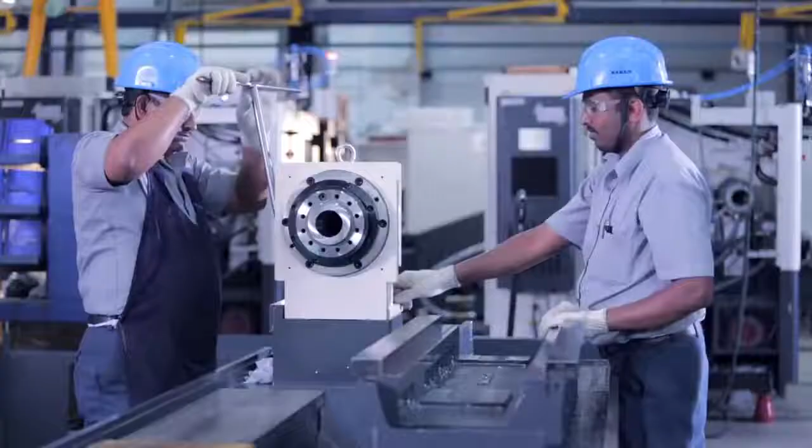With 42 years of machine building excellence and the experience of delivering 60,000 machines, Ace Micromatic Group, AMG, has played a key role in the industrial evolution of India and the world over. With more than 70% repeat customers, AMG is renowned for its technical capabilities in the machine tool realm.

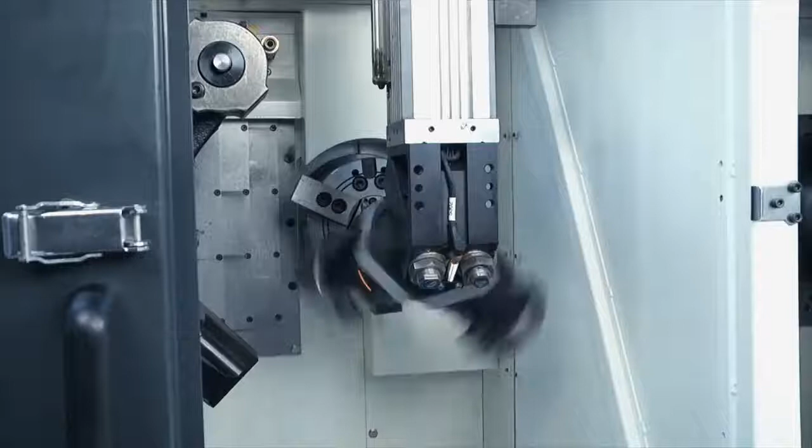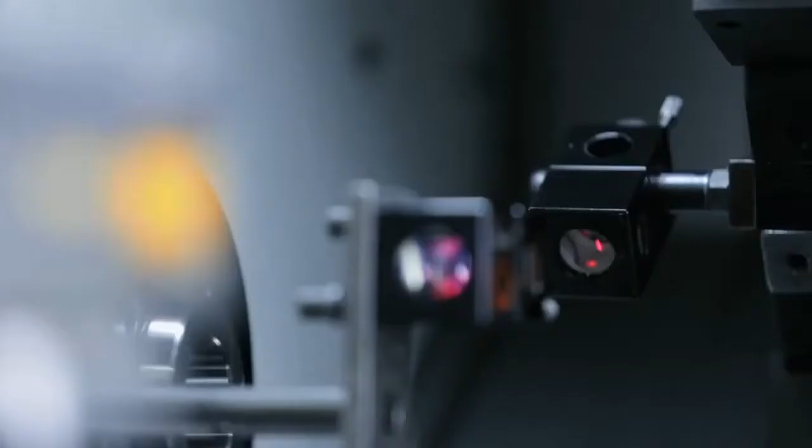Driven by passion for service, cost effectiveness, and a strong value system, AMG is the preferred machine tool partner across market segments. With a global footprint in over 15 countries, AMG machines have been an invaluable resource in producing quality components for a diverse range of applications.

With the vision to be a single-window solution provider for all customers' shop floor needs, we offer a wide range of products in the market, ranging from turning, milling, grinding machines, SPMs, to IoT and automation solutions. The group also envisions to diversify into newer technologies and geographies, thereby offering a wide range of solutions to our customers. Ensuring customer success through cost-effective solutions has been the motto of the group.

Today, with the inclusion of AMACE Solutions as our additive manufacturing arm, we are ready to revolutionize the manufacturing industry yet again. The current global metal additive market is valued at about $2 billion but growing with a CAGR of 29%. The additive manufacturing technology is rapidly evolving to be a preferred way of manufacturing. It is now seeing widespread adoption in sectors like aerospace, defense, medical, automotive, among others.

AM technology is being explored not only for prototyping but also full-fledged production of parts. With the increasing acceptance of technologies like laser-based powder bed fusion today, we have reached a position where these machines need to be made in numbers viably to cater to the demand that is gaining. We welcome you to the additive manufacturing era.

Additive manufacturing offers unlimited design freedom. Design parts without worrying about process feasibility limitations that come with traditional manufacturing. In addition to this, the technology enables multiple parts with design variations to be printed in one go. AM simplifies part structure by eliminating auxiliary connectors and reducing the assembly time.

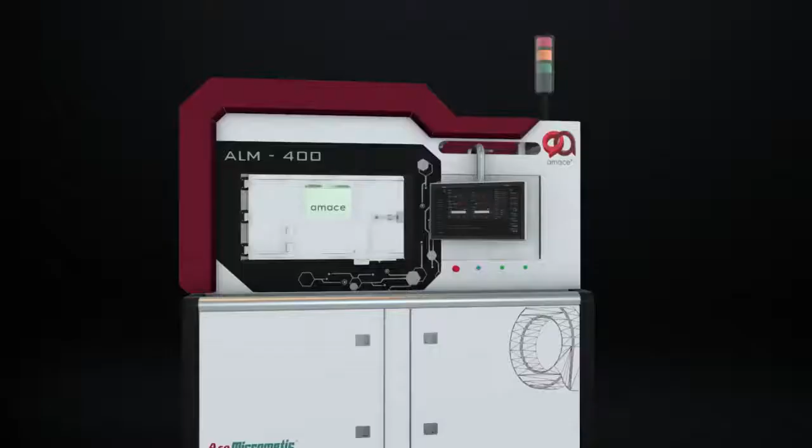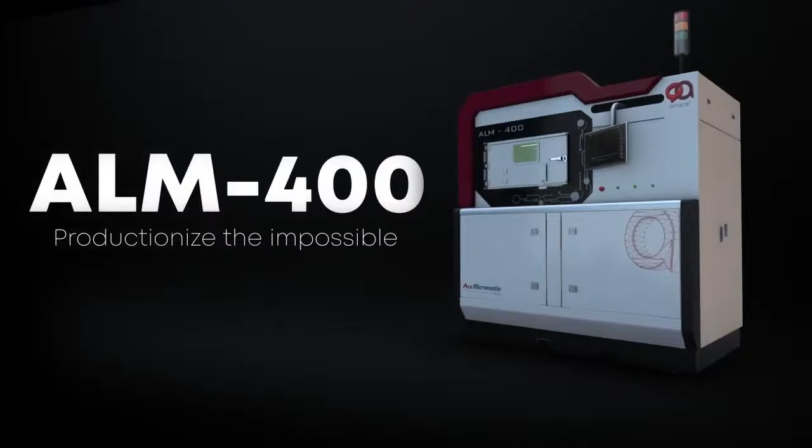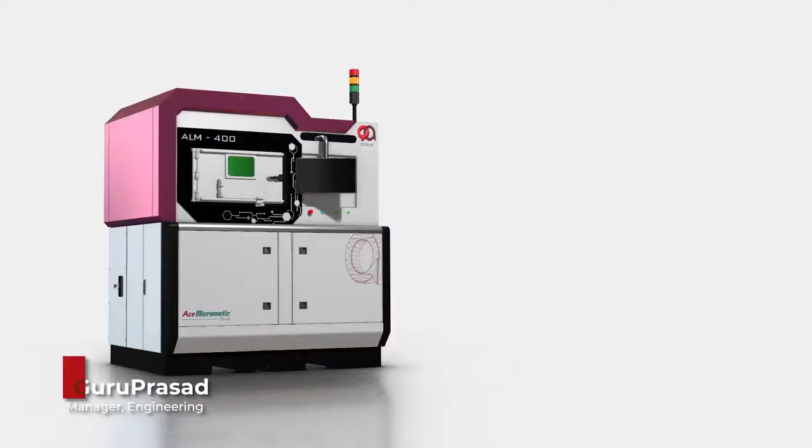For us at AMACE, the focus has always been to develop production-ready machines to suit large volumes of part printing. It provides the flexibility to address larger sized parts and also higher volumes of printing. The machine is designed keeping in mind the wider variety of materials that would be required for development and experiments by the industry. Versatility of printing has been a key consideration in the engineering process.

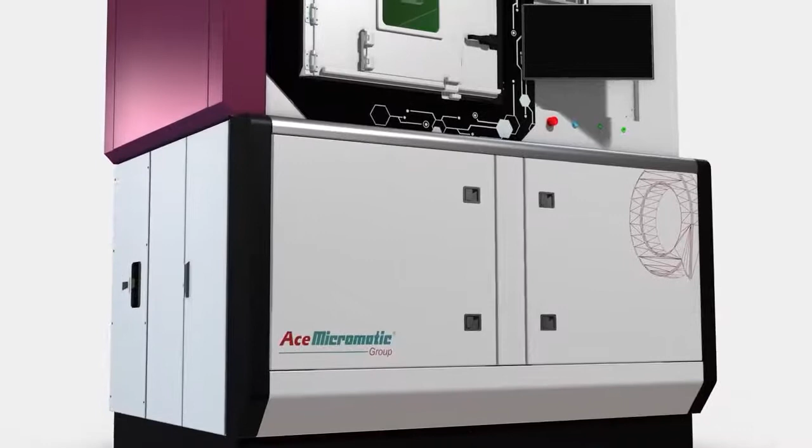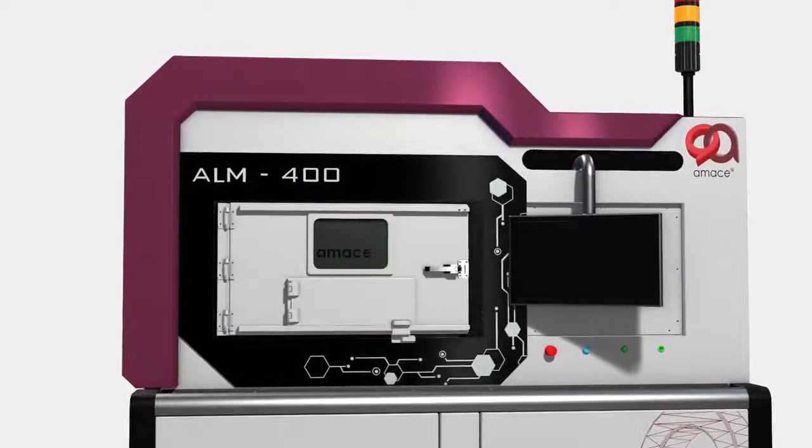The machine is equipped with a high productivity printing process and enhanced build parameters. This allows the printing process to be completed faster. The machine has all the necessary features to minimize the setup time, preparation time, and changeover time. The machine has a build envelope that allows large size parts to be printed on it.

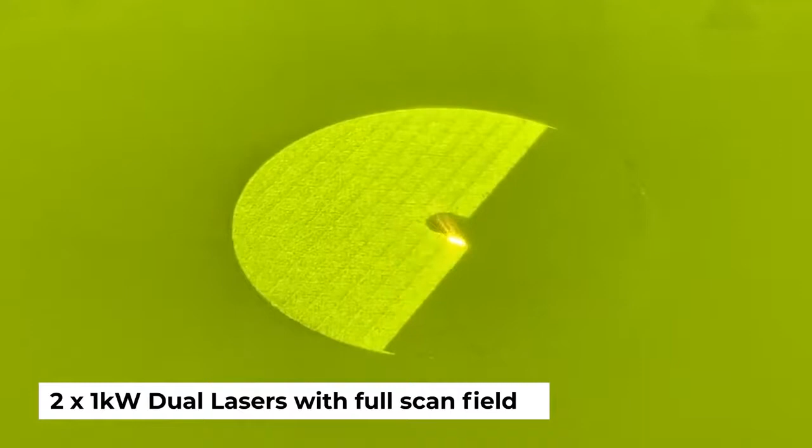A high-powered dual laser system enables faster printing with the ability to print higher layer thicknesses. With two high-powered continuous wave fiber lasers being offered as a standard feature, the machine allows for a wide range of materials and applications to be developed. The machine allows varying layer thicknesses to be printed.

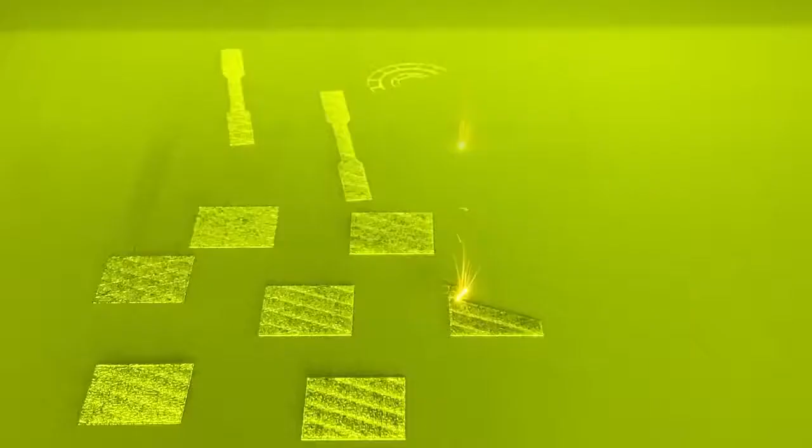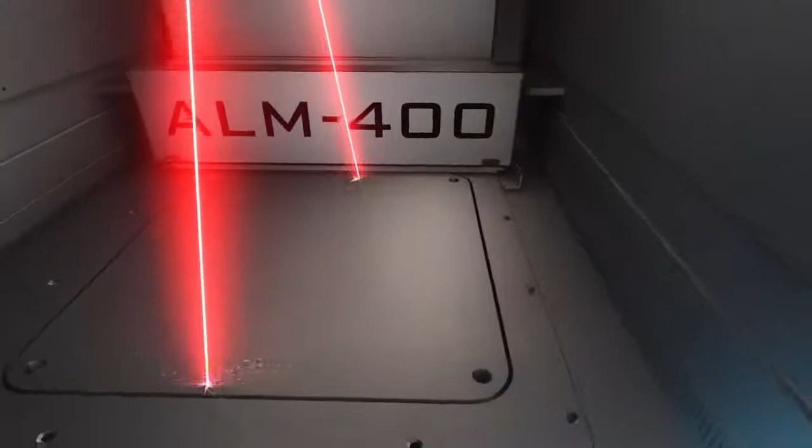The scanning system with digital encoders provides superior positioning accuracies and long-term stability, making it suitable for long periods of printing with minimum drifts. A dynamic focusing system allows exceptionally precise, high-performance positioning of the laser beam along the optical axis. The full scan field scanning system allows both the lasers to reach any corner of the build volume, thus more than doubling the print productivity.

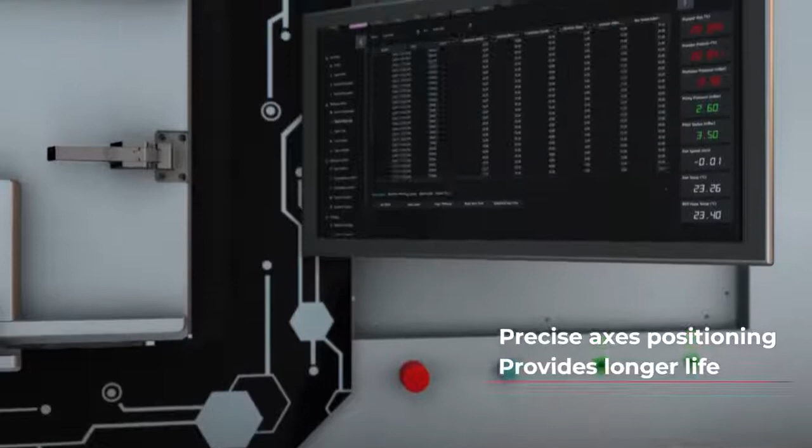The machine is equipped with an all-servo motor controlled by the most advanced PLC hardware, allowing more precise axis positioning, longer life, and enhanced serviceability. This also ensures a faster recoating, thereby minimizing the overall print time.

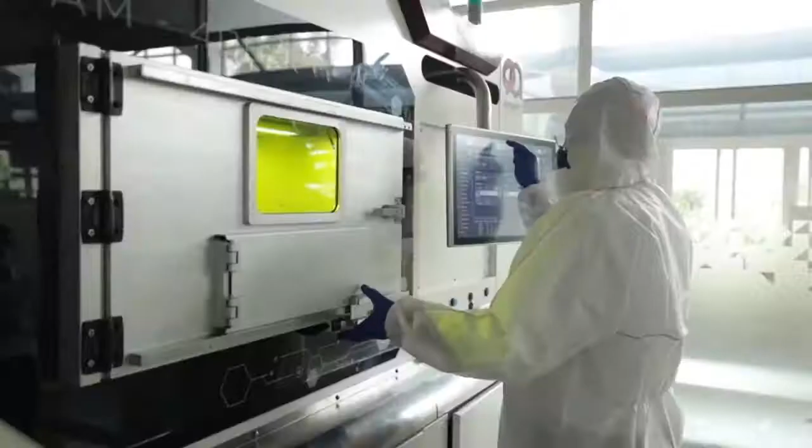An innovative multi-blade recoater system facilitates printing with minimum downtime during a build failure. This technology allows the operator to quickly index the recoater blade in the event of minor damages to it, thereby salvaging the build. A recirculating pump ensures minimum consumption of the inert gas, which is generated from a built-in system. The laminar gas flow on the powder layer maximizes the collection of the burnt powder during the printing process, thereby ensuring superior quality of the printed parts.

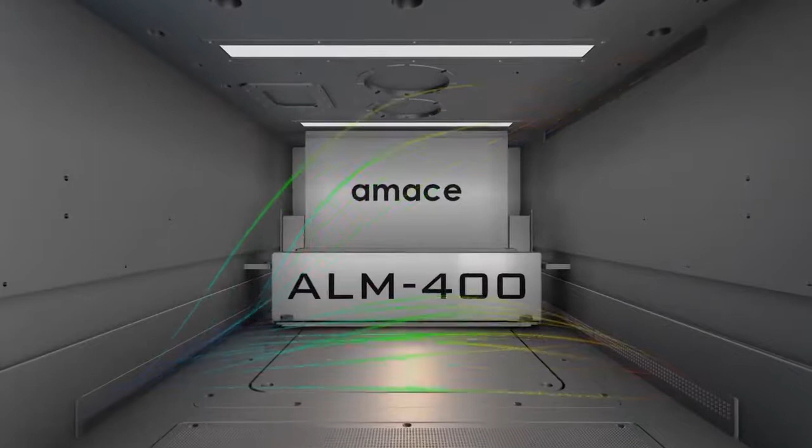The ALM 400 comes equipped with a host of features to enable safe and effective powder management. The smart powder management system comes with a real-time powder measurement unit which provides the current volume of powder available in the machine's storage section. A predictive system dynamically estimates the exact amount of powder required to complete the current print job based on the layer volume. This smart system allows the operator to plan for the amount of powder required in advance without having to stall the machine for want of powder.

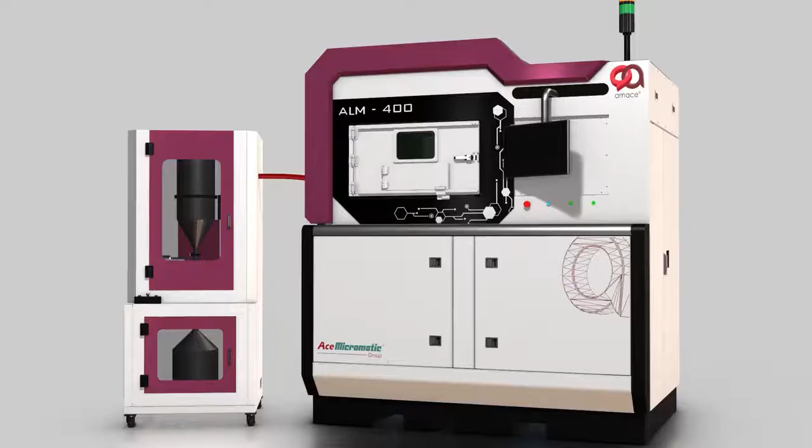A fast powder extraction system from the build chamber post-build ensures the machine is ready for the next print job in short durations. The entire powder collection from the machine's build chamber, sieving and restoring of clean powder is maintained in an inert environment. The machine is offered with fully open, editable parameters for a wide variety of metals such as aluminum alloy, stainless steels, maraging steels, Inconel, titanium, and many more.

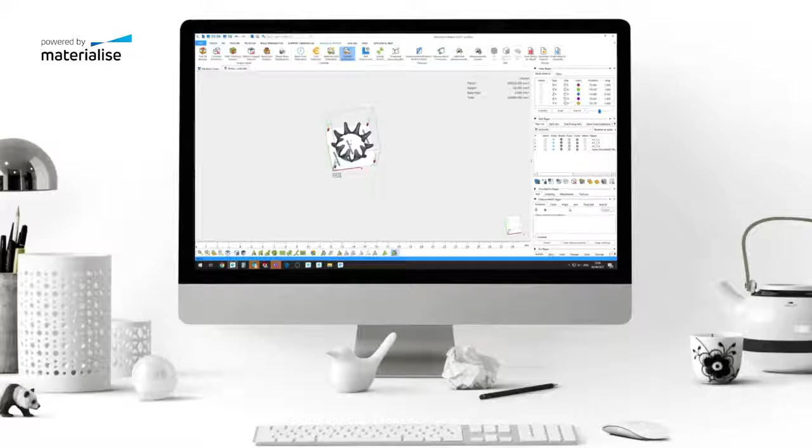The machines are built with best-in-class subsystems providing the highest level of machine reliability and superior quality of printed parts. The laser and scanner control system, which is the heart of the printing process, is controlled by hardware and a custom-developed software from Materialise. The build processor offers a seamless integration with the Magics and support generation software with most optimized data flow for build speed improvements.

The machine design is validated by an expert team from Materialise. The ALM 400 also complies to some of the most advanced machine building standards in terms of geometric capability assessments. The machine is made friendly not only to operate but also for maintenance and servicing.

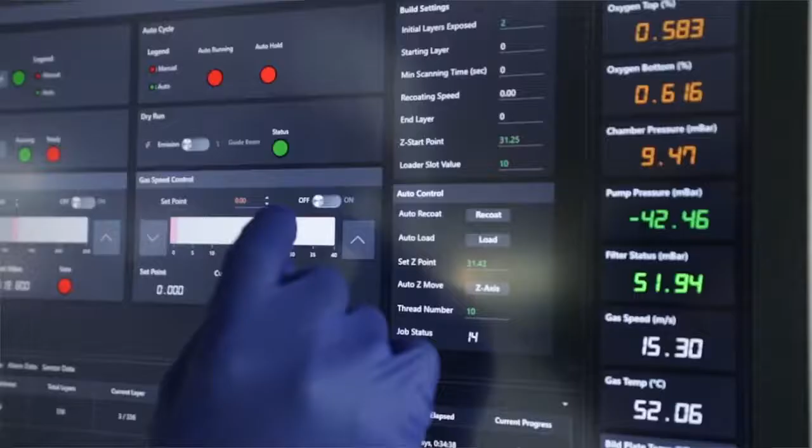The powder loading is done outside of the build chamber, giving the operator freedom to load powder during the printing process. There are troubleshooting guides that support in faster retrieval of the machine, ensuring minimum breakdown time. Periodic maintenance alerts along with real-time monitoring of the vital statistics of the machine ensures better reliability and higher productivity.

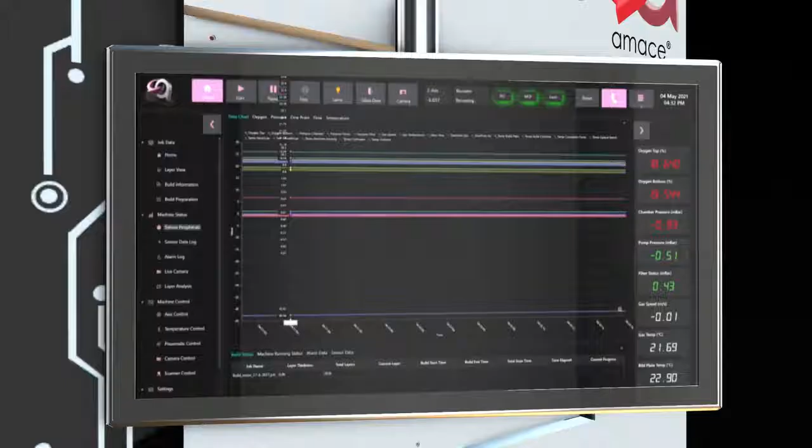The ALM 400's control interface comes with inbuilt intuitive features facilitating the user with timely inputs about the machine status and recommends suitable action if required. This also ensures smooth operation with minimal intervention, further enhancing the user experience. Key parameters such as pressures, temperatures, oxygen levels, coolant level, and many other critical parameters are monitored and controlled.

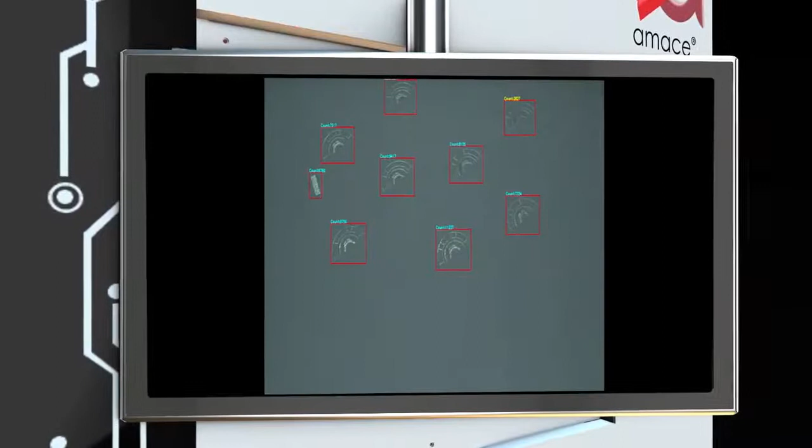A digital cockpit provides the machine's performance parameters with historical data of the build progress. A vision-based monitoring and inspection system identifies the deformations or issues in print after every layer. The inspection tool also compares the print area to the layer data and detects any non-conformances in the process, thereby allowing the operator to decide further course of actions.

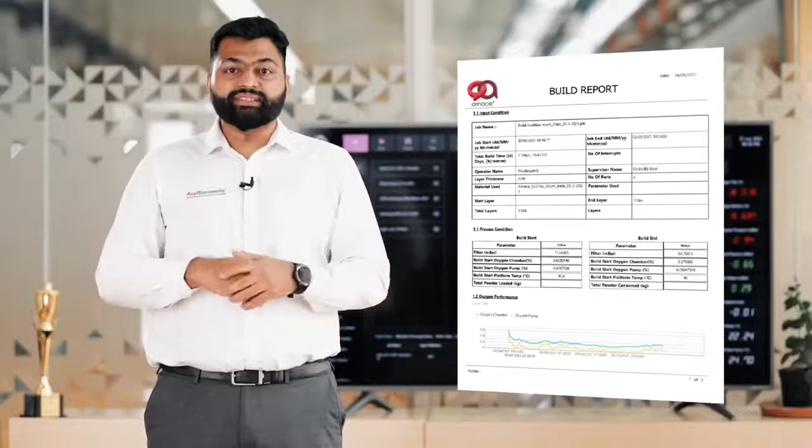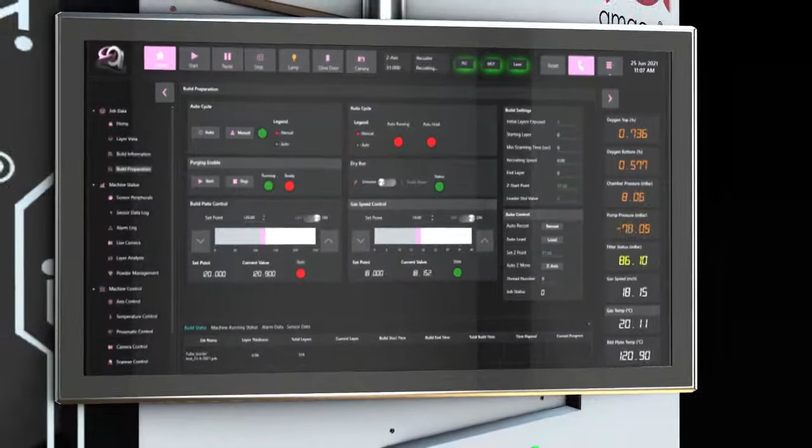A build report generated at the end of the print project provides all the performance-related information for records and quality purposes. The controller also features an auto-purge mechanism for the multi-stage gas filtration system, minimizing the need for manual intervention.

The machine is offered with all related pre-processing software, starting from optimizing the part design, support optimization, nesting of the parts, and simulation of the parts to make the build more suitable for additive manufacturing. Simulation of the build analyzes and predicts build failure before printing the parts, which ultimately saves the time and cost

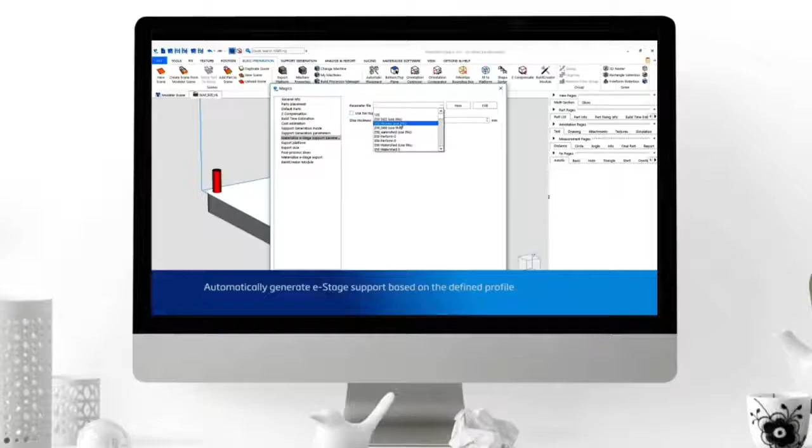of the printing. AMACE offers an end-to-end additive manufacturing solution with post-processing equipment, most suitable for finishing the part after printing to its end-use application. With access to ACE Micromatic Group's complete ecosystem of solutions such as machining centers, turning centers, and grinding machines, there is a wide variety of options to choose from. With this, we ensure customers have the competitive edge in part manufacturing with a combination of technologies.

The AMACE ALM 400 machine has been designed to ensure the user gets the highest level of productivity at minimum overall cost of ownership. Let's look at some examples here. Up to 600 different designs of aluminum nozzles for a spraying application nested in a single build can be produced in 20 hours. A part like this could typically cost as low as Rs 150 when printed on the machine.

In this case of an automotive bracket part, printed in aluminum, it took as low as 40 hours for a batch of 20 parts nested in a single build. Another case is printing this aerospace part, the exhaust mixer, which has a diameter of 373 mm; when printed in Inconel, it took less than 19 hours.

A die insert printed in Maraging steel with conformal cooling having a volume of 1600 cc takes about 55 hours to be produced. Not only are these parts faster to produce but also more cost effective. Typically, these parts can be produced 30% faster and would cost 60% less when printed on the ALM 400 machine. This makes the machine suitable not just for prototyping but also for serial production applications.

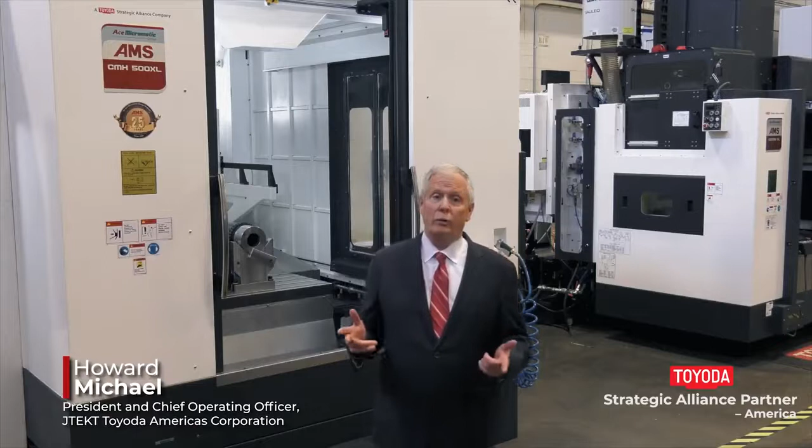Hello, my name is Howard Michael, President and Chief Operating Officer of JTEKT Toyoda Americas. Toyoda Americas is thrilled with our strategic alliance with ACE Micromatic. The addition of ACE products has strengthened our portfolio of high-speed production machining solutions. For several years now, ACE Machining Centers combined with Toyoda Turnkey Engineering and Robotic Solutions have been very successful. The equipment has proven to be robust and reliable in production environments, and as a result, we have steadily increased our inventories to meet the expanding market demand.

We are excited to continue the growth of our partnership supporting ACE Micromatic's venture into additive manufacturing with ALM 400 3D metal printing. Many of our customers are already seeing the benefits of 3D metal printing for prototype work. The uniqueness of this new product offering from ACE is the focus on production solutions. We are confident that this machine will be a game changer in the additive manufacturing industry. We are excited to represent this machine and look forward to the value it will provide to the growing additive manufacturing market. Thank you.

With a vast network of Micromatic machine tools present in 60 domestic locations and in more than 10 countries worldwide, you will be assured of the best after-sales support. With locally available application and service engineers and essential spares stocked in every location, we ensure you have maximum uptime.

We are proud to bring to you quality additive manufacturing machines that have been built with years of dedication and hard work, backed by 4 decades of machine building excellence. This series of high productivity machines made to global standards is here to change the perspective of metal printing, facilitating faster adoption. We strongly believe metal printing has come of age and is here to stay.